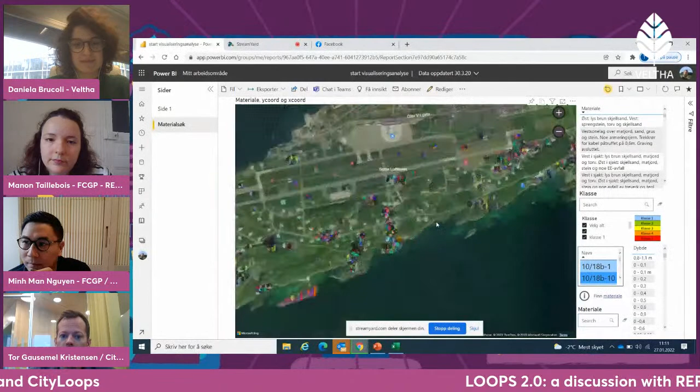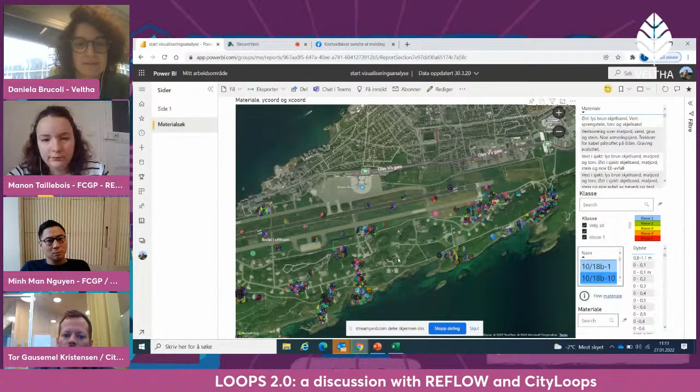So why do we have focus on visualization? Well, we think that it's a good way to make information more understandable, to make this information, as you can see in my Excel sheet here with hundreds and thousands of rows, look like this, for example. This is the same information that we saw in the Excel document, where we have summarized the information and placed it geographically in a map where we can go into these observations and see, sadly in Norwegian, what kind of soil lies there, how polluted it is, what is the reason for the pollution, and the reusability of the masses and materials lying in this area.

How many minutes do I have left? Do you know that, Daniela? Don't worry, Tor. Just keep going.

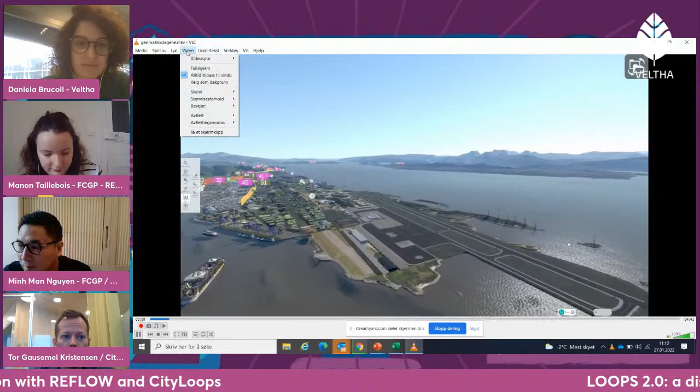Okay, thank you. So we think that visualization is a very effective way for monitoring and planning for city planning purposes, and also for inhabitant involvement. I want to show you a short clip here. We had a survey where we asked the inhabitants of Bodø how they wanted the new airport to look. What you're seeing now, this airport does not yet exist. This is a 3D model, but it represents how it would look with the new airport.

And as you can see now, I'm populating the map with some data, the red lines there. These lines represent the noise zones from the new airport, exemplifying how we are combining data with visualization, and we can use this data for city planning. Maybe we can plan which kind of buildings shall be in the new part of the city that you can see in front of you now.

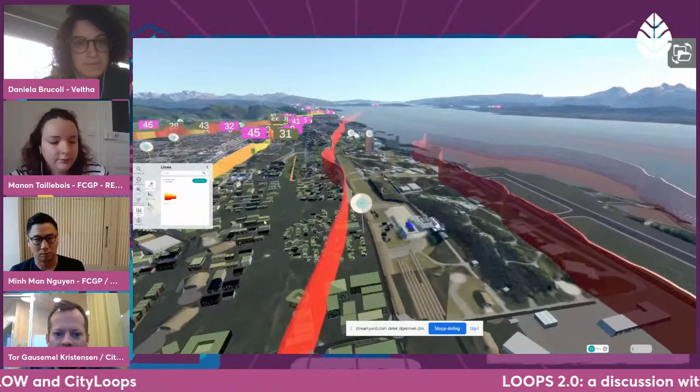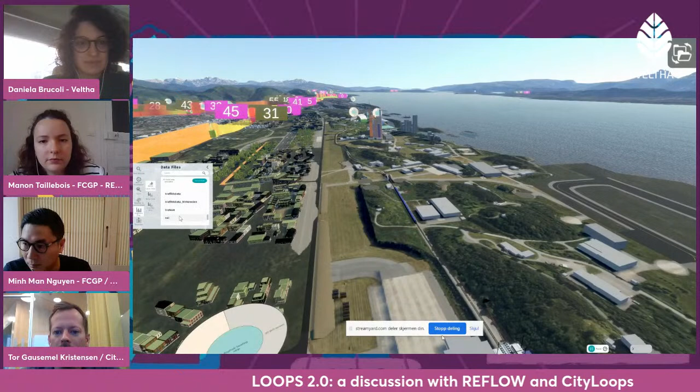As I said, I'm a circular economist, I don't know if you can call yourself a circular economist, but I do work with circular economy. And we find it really interesting to try to identify which kinds of materials and masses lie in this area. So as you can see in what I just showed you, we are accounting for what lies there and trying to find ways to reuse the identified masses and materials.

I am speaking fast now and things are going fast, but there's so much I want to show you, so I have to do it given the time limit.

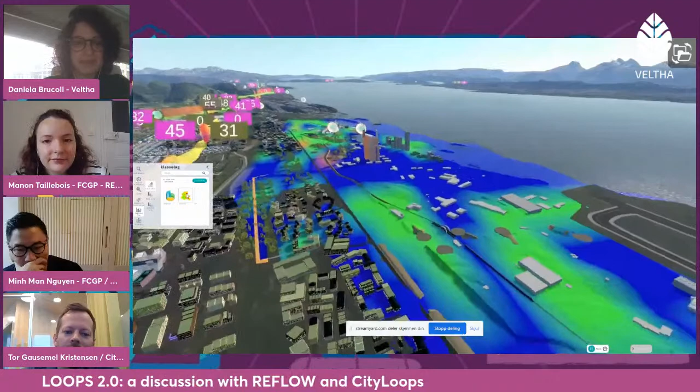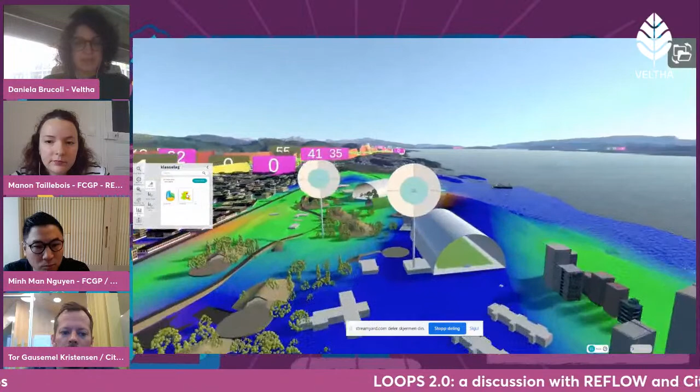This is a heat map that you see here. This represents the degree of pollution on the soil. This is actually the same Excel sheet that I showed you, but summarized really. I've dumbed down the information to 3 different categories. That is not polluted, lightly polluted, and very polluted.

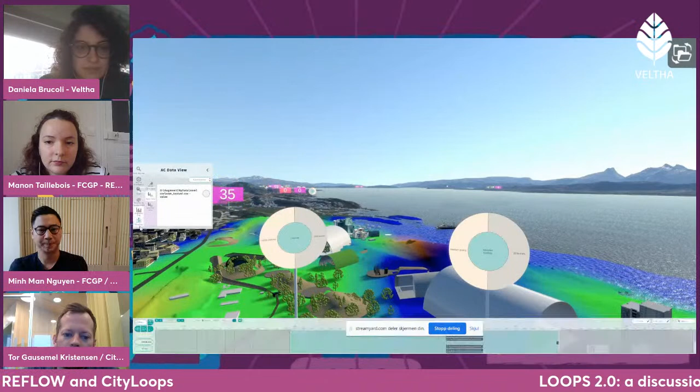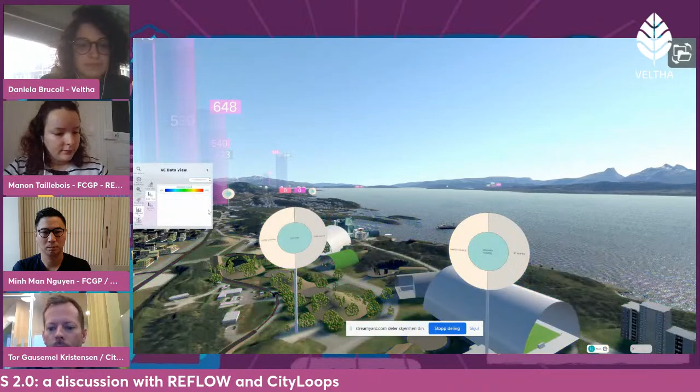These hangars that you see here, these are a response from the survey to the inhabitants when we asked them how they wanted to repurpose the hangars, because it's really hard to demolish these hangars. So the most circular way of treating them, I think, is to just find new ways of using them for a football field or a training center, or maybe you can use the shooting range that you're about to see here now, re-regulate that to a concert scene, for example. So this is just concepts that we're trying to play with in this digital twin of Bodø.

These bars that you can see in front of you now, the bars that are moving up and down, that's the traffic. We have live traffic measures, so that we can try to measure the development of traffic in this city, and to see which roads have the most intensity in traffic.

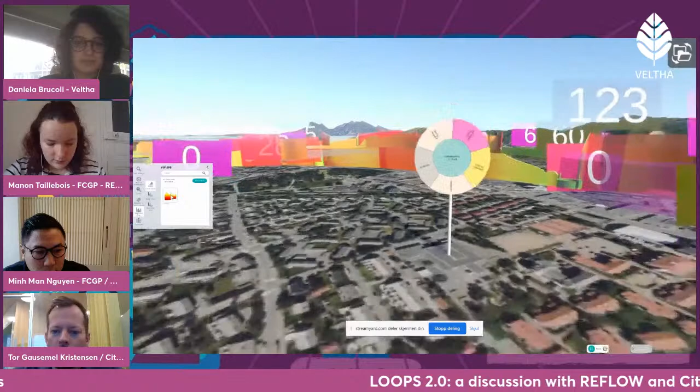This lollipop that you can see here represents one municipal company and the waste generation, so that we can actually measure how much waste our different companies are generating, and we can also see to how big of a degree it is sorted.

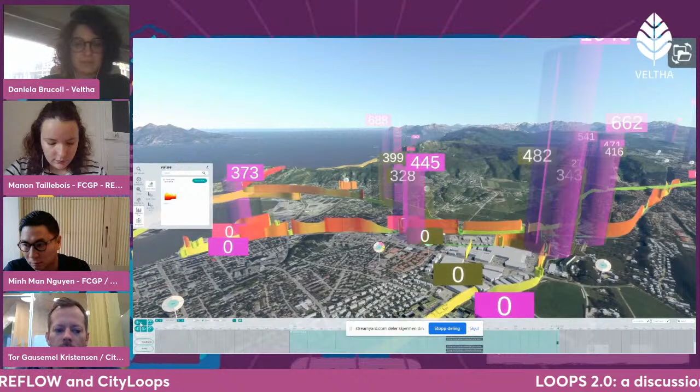So I have 1 minute left, maybe. I can also show you another way we're working with this visualization system. You can see here now I've deleted the hypothetical city, and this is the actual city, how it looks now. And I just wanted to show you these roads.

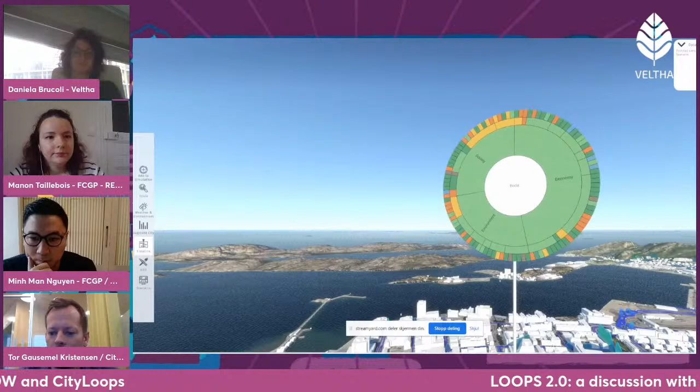You can see here on the roads some data bars. And these data bars, the green ones that you can see where my cursor is now, they represent the modeled emission from traffic. So we found it interesting in terms of circular economy, because we want to make scenarios on how much emission one could save if we treated masses and materials where they are, rather than transporting them on these roads.

And these data bars that you saw can help us prove the effect of circular economy. But not only circular economy, it can also help us to do some infrastructure planning and transport planning of masses and waste in general.

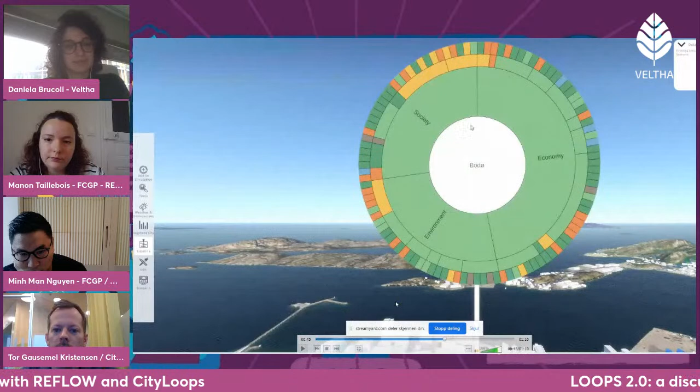What you can see here is a wheel that shows all the sustainability values in UN context, what they are looking into. In order for us to call ourselves a smart and sustainable city, we need to report on some 200 different KPIs, and this summarizes that data. So you can see that it's divided into 3 categories: environment, society, and economy.

And you can go further into the different subcategories to look at how good we are at waste treatment, for example, or water and sanitation. We're not that good in water and sanitation, as you can see, because there are so many red areas here, meaning that the water quality is not bad, but we are consuming too much water, and we need to be better in that. And this wheel helps us identify where we have improvement potential and where we're actually doing pretty good.

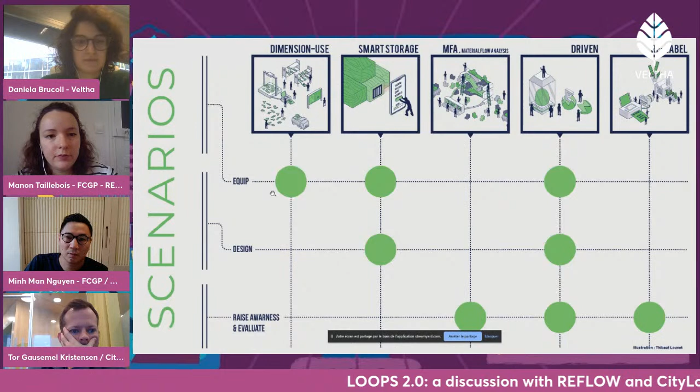The second scenario is Design, meaning that wood material will be reused between different events and temporary constructions, and the use of reused wood material by those actors will be facilitated. Designers and architects will be able to conceive their projects using an inverted design process.

Finally, the third scenario is Raise Awareness and Evaluate, meaning that awareness around circular practices and technological solutions for circular economy will be raised among professionals of the event and temporary construction industry.

As you can see on the graph, we developed multiple solutions that are interacting with, for most of them, many of the different scenarios at a time. I will go into more detail on most of the tools presented there, and then Minh will present a concrete use case example of some of the tools in an event.

If you go to the next slide: the first tool is Dimension Use. It is developed by Fab City Grand Paris and WOW. The Dimension Use is a 3D digital scanner developed as open source to digitalize reuse materials.

Basically, it's creating a database of materials collected through the construction or the event industry with precise measures of the dimensions and additional information about the material state. Once it's digitalized, the material is accessible through a public database, allowing the actors of the full life cycle to get more visibility on what material is available and where.